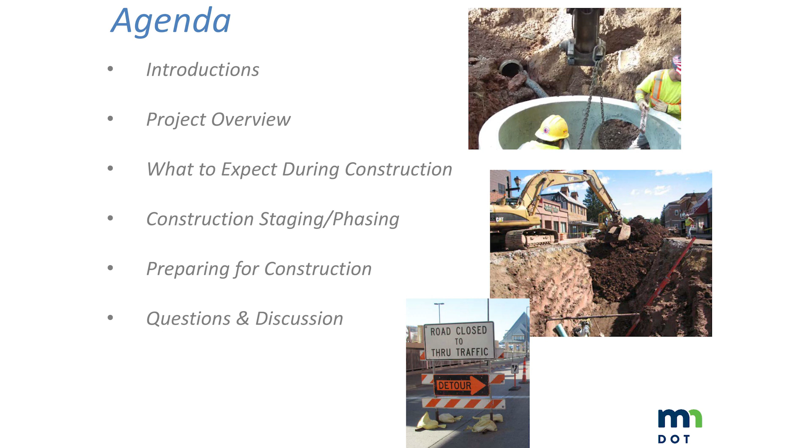So with that said, this snapshot literally comes from the title sheet that'll be on top of the plans. And the thing here tonight, I think we're going to really focus on the impacts in the downtown area. But the project does extend outside of the limits of Grand Marais.

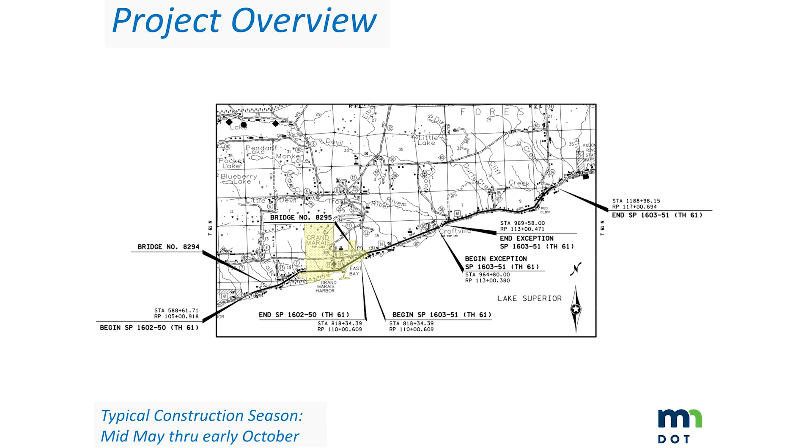So basically, when you look at this map, the yellow highlight is the corporate limits of Grand Marais. Down here near the south end of the project, about 3 miles south, the project begins near the Fall River, goes through Grand Marais, and goes for about 7 miles north of town and ends there.

So before we get into this, we want to try to give a quick overview of what the project entails and some of the terminology we're using. The project actually consists of different types of construction work, 4 different types of work, some within town, some outside of it.

Rural mill and overlay. When we talk about rural work on this project, we're going to be talking usually about the work that's outside of town. So that's basically what that's going to mean in the context of this discussion. It'll be the version of Highway 61 that you see when you come in and out of Grand Marais, a lane of traffic in each direction, 10 to 12 foot shoulders, and grades that go down to a ditch.

That work out of town from a roadway perspective is pretty much mill and overlay work with some details that we'll get into. That's where we mill the surface of the pavement a couple inches and put it back, and that's a rehabilitation to get some new life out of the pavement.

Urban, the next 3 bullet points - urban will generally refer to work that's in town. So urban has that meaning, which means we're in town. It also generally refers to a roadway that has curb and gutter. So that's the major use of that term. And then we've got 3 different types of work within town.

We've got a mill and inlay, which is basically the same type of work, a preservation scope - we'll show you some slides on that. Then we've got what we call full depth reconstruction, which is basically the idea that we're completely digging out and putting back the road, and we're also doing utility work below that road. So that's kind of the 'tearing down the house and rebuilding it' option.

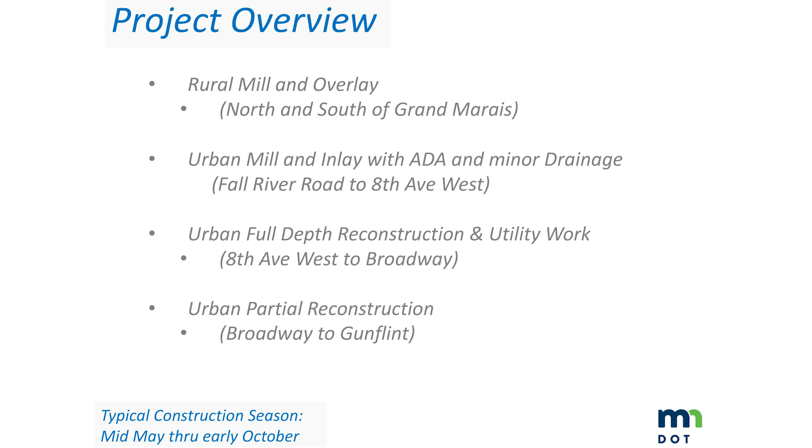And then we have kind of a hybrid of those two, which we're calling the partial reconstruct. And that goes from Broadway to the Gunflint, and we'll talk a little bit about what that means, but it involves both some of that preservation mill and overlay scope and some fuller depth digging.

So this slide shows you a comprehensive view of the project. So the light blue areas down here are that mill and overlay work, south and north of town. Again, we've got about 3 miles south of town that's mill and overlay.

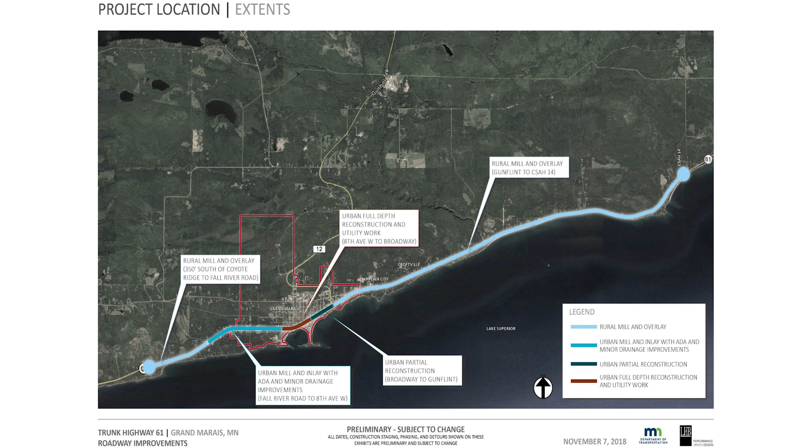That starts down by Coyote Ridge. And then north of town, just past the Gunflint, we get into mill and overlay work again. South of town, we are replacing the Fall River Bridge or box culvert, and that's going to require short-term closure of Highway 61. We'll talk about what that means in terms of traffic and potential needs to detour.

Here, this is that urban mill and inlay work. So we'll look at this, but basically from this point south or west, and I'll apologize in advance for this confusion. Statutorily, Highway 61 is considered north and south. That's how MnDOT refers to its highway. Very aware that within town, the highway generally runs west to east, and so I'll be balancing those terms as best I can.

Coming from the west or south, you've got 8th Avenue West. West of 8th Avenue West, we're not really changing the geometry of the street. It'll be the highway you're used to, but it will get pavement reconditioning, and there'll be a little work on the walks. The bigger impact begins at 8th Avenue West and goes to Broadway, and that's the full depth reconstruction where we're talking about digging the road out, digging utilities out. It'll be a big impact in the downtown core. From Broadway, from east of Broadway to the Gunflint, we've got that partial reconstruct section.

So again, all this adds up to about 11 miles of overall project: 3 miles of rural mill and overlay south of town, half mile of full depth reconstruct, half mile of partial reconstruct, and then 7 miles of mill and overlay in the rural section north of town.

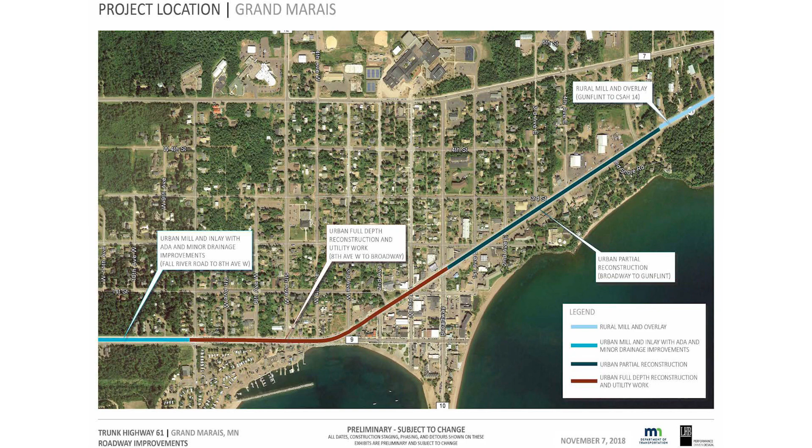So to give you a little bit more clarity on what this means, now we're going to narrow this down to what's happening in town for a lot of this discussion, but we'll come back to some of the bigger pieces out of town. So this is the urban preservation or the urban mill and inlay work.

This is what we call a typical section. So if you imagine the road as being a piece of cake and we took a slice and pulled that wedge out, this is the cross section of the road. The thing to take away here is you've got the in-place geometry that I'm sure you're all familiar with. We've got that 12-foot center left turn lane, a lane in each direction, and variable width shoulders that are either parking or turn lanes or versions in between.

The dash lines on either side depict that we're really not doing anything. That's an existing condition that's going to persist. And the dark line atop the pavement shows you that all we're really doing is that thin veneer of pavement within that road core. So again, the geometry of the road isn't changing. This is work that is generally done under traffic and is pretty straightforward.

The work happening in addition to this is what we call ADA work, Americans with Disabilities Act. That'll be selectively replacing some sidewalk panels for people that have disabilities or mobility issues, but relatively minor in the scope and scale of this project.

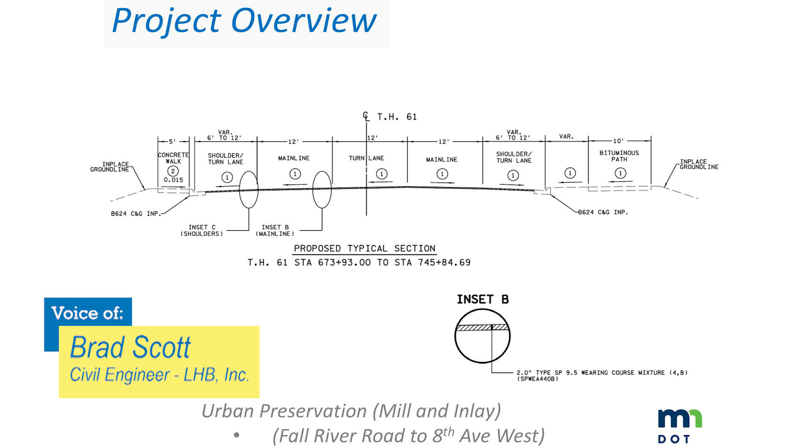And the layout process that the city went through with MnDOT came to a revised typical section, which is a road diet, as we call it, or basically a narrowing of the highway, so that the new pavement section really eliminates that center left turn lane. We've got a lane of traffic in each direction, 2 12-foot lanes and 10-foot shoulders. So you go from a road that was anywhere from 54 to 59 feet wide down to a road that's pretty much consistently 44 feet wide. So it's a narrower road.

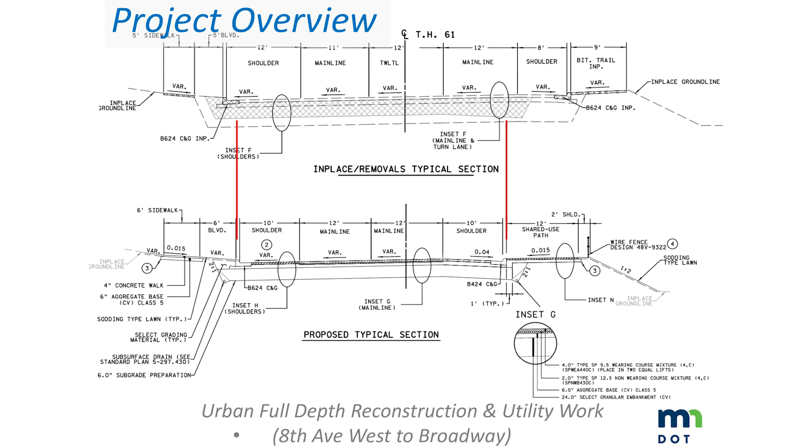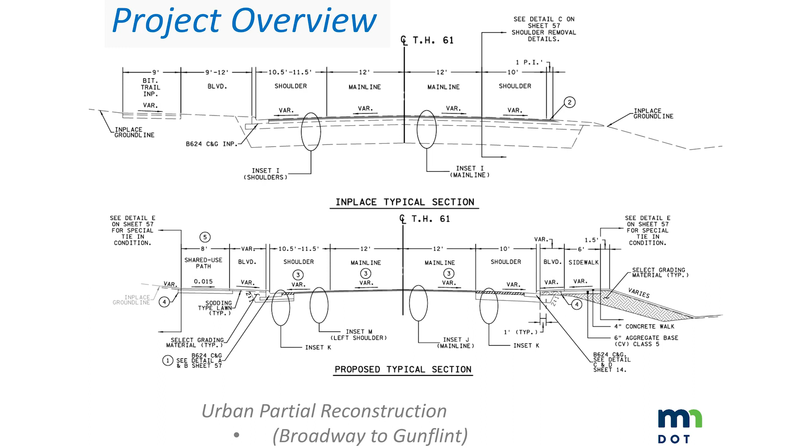So what we want to talk about with this next sequence of slides is, again, to give you an idea of what to expect. This is what the project's going to look like on your front doorstep.

The thing we can say about these slides is that this is very predictable. The projects of this type are not unique. There's definitely a flow and logic to how they get built. So as we go through this, it should give you a good sense of how the project's going to progress and what the major elements are and what impacts you can expect.

At the start of the project, the contractor shows up, and the first thing he has to do is separate his work area from the areas where traffic and people will be during construction. We call that the mobilization phase. The contractor installs these perimeter controls, including traffic control signage, and we'll show you what that'll look like and what the implications are. You'll have barriers adjacent to pedestrian walking zones where you have business access.

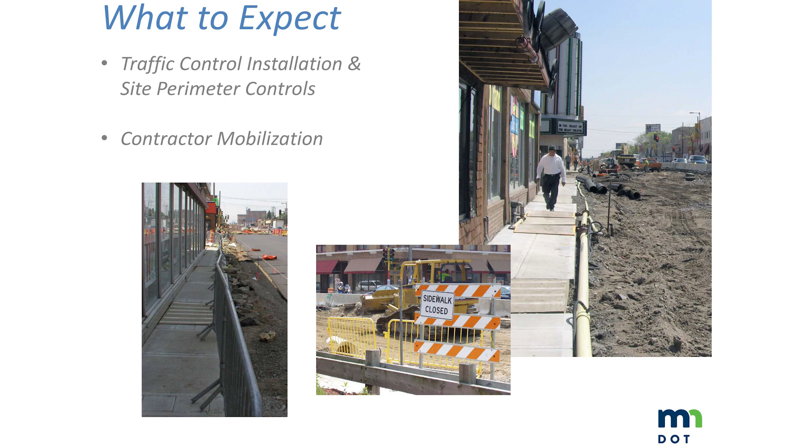This slide on the right really gives you a sense of what that'll look like, especially in the downtown core between 3rd and Broadway. The work zone will be immediately adjacent to a lot of building storefronts. There'll be an active work zone right in the heart of downtown, and it'll be there for that entire construction season.

But we'll talk about that, there's some nuance there. So after mobilization, what happens? Well, the first thing is they're going to rip off the surface pavement, and pretty much everything within the MnDOT right-of-way is going to get pulled out. The excavator comes in, rips the pavement, rips the curb out, loads it into the trucks, and we get rid of everything, basically exposing that base material beneath the highway.

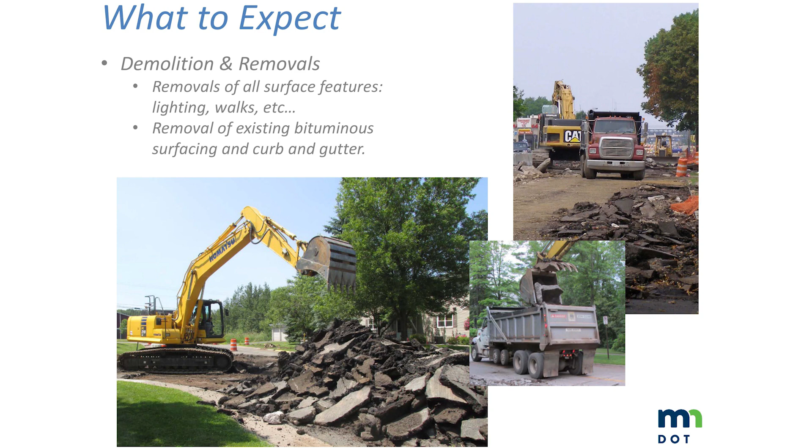Then the next phase for the contractor is to start the utility work. As I mentioned, when MnDOT came to the city and said we've got this project, the city responded that they want to be involved and have existing infrastructure that needs to get replaced. One of those pieces is city water main. There is water main that will get removed and replaced with this project from 8th Avenue West to 5th Avenue West, and there are also crossings at the avenues listed there.

The main thing here is that the contractor generally builds the project from the deepest utility up, and water is usually one of the deepest utilities next to the sanitary sewer, typically at a depth of 7 to 10 feet to be below the frost depth. The big thing I'd draw your attention to is that when you go down to 7 to 10 feet, in order to build an OSHA-safe trench and meet all the requirements contractors have to, they have to lay that trench back.

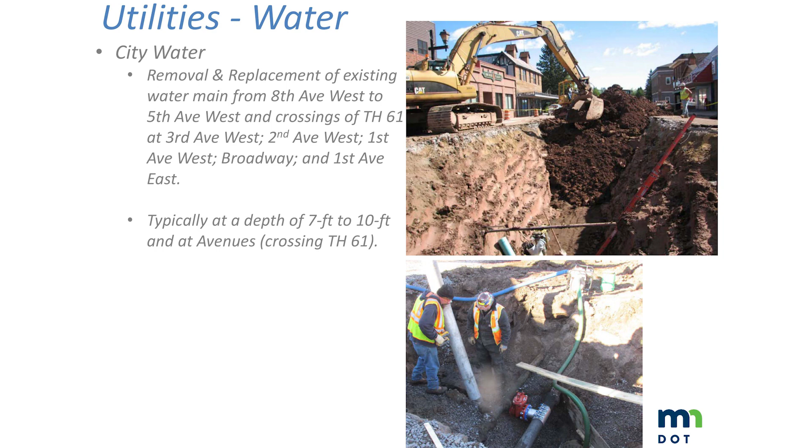So when you go down 10 feet, you're laying a slope back that creates a swath of excavation that's anywhere from 20 to 30 feet wide as you go down where that water main is. That's a representative section of what that's going to look like, and this water main runs parallel with the road. We'll show you some slides.

One thing that gets into construction staging and sequencing is that when you build a new water main, people are relying on that water main, so you can't simply dig it up and tell people we'll come back in 3 months when the water's ready. A key initial phase is to build a temporary water main at the surface, smaller diameter, which gets built and disinfected. There'll be a connection to that temporary main for each service on the current main, with a short interruption of service, usually 4 to 6 hours, coordinated in advance as much as possible.

The contractor should know where he's at and will tell people, we're going to do your water service today, you'll be out of water for a few hours. Once everyone is connected to the temporary water main, the new water main gets installed. At the end of that, there'll be a similar interruption where people are taken off the temporary main and put back on the permanent main.

This is an interesting aspect of this project - we're doing 2 types of water main replacement. One is the classic method where we dig it up and build it back. The other is called pipe bursting, where we use the in-place water main as a conduit to pull the new main through using a pipe cutter. Same process, same impact to the public really for either method.

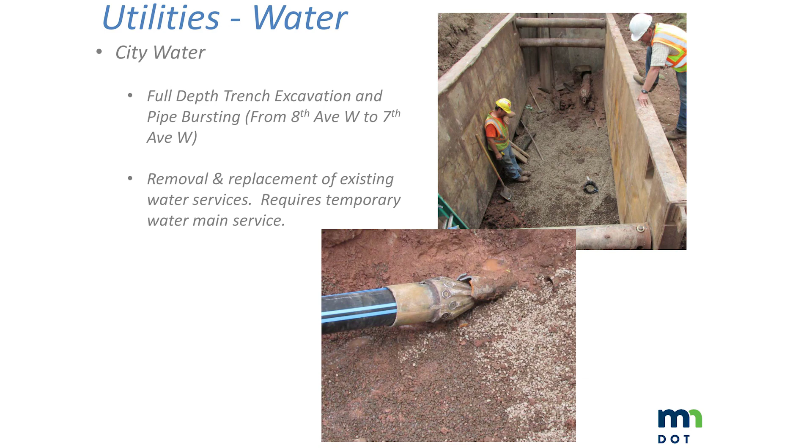After we get done with the water main, the city has old sanitary sewer that also needs to get replaced in this part of the project. The old sanitary is very similar to what's shown here - old vitrified clay pipe, very brittle. In the case of the existing sanitary main and for the city, it's in very poor condition, so it wasn't an option to line it or rehab it in place. It's really got to come out.

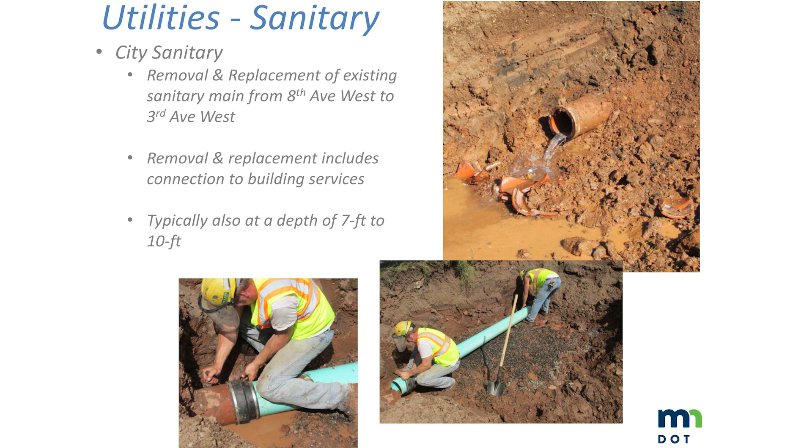This utility is also 7 to 10 feet deep, and it'll get replaced with new PVC pipe. The picture here shows the connection between the old and the new. This is similar, but a little less impactful or disruptive to anybody with a service connection. They'll bypass flows to get around the work area, and the contractor will ask people to limit their water usage during that connection period, but it should be less consequential than the water main connection.

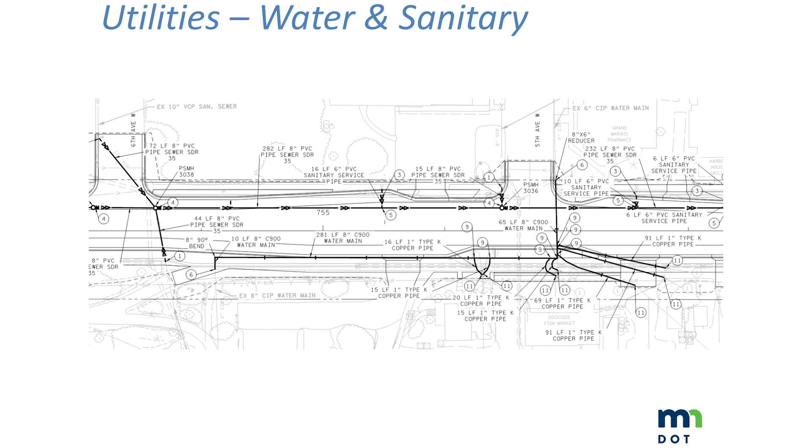This is a snapshot from our current plan showing a segment from 6th Avenue West to 5th Avenue West. The sanitary main is depicted by the long line with the 2 arrow dashes - that's the sanitary main. There's manholes, and there's also service connections coming off that have to get connected. The water main, on the other side of the highway, runs laterally with the highway, and you can see all the branching service connections coming off of it. It's a big impact within the core of the highway, but that's actually not unusual - that's typically where water and sewer utilities are.

The next utility is storm sewer, because it's usually the next deepest pipe. Storm sewer is the system that collects rain and storm water from the highway, going into catch basins and down into pipes. This tends to be shallower, so that big trench gets a little smaller. There's a trade-off though - catch basins tend to be more clustered at intersections, so you'll see more impact at these locations, with leads coming from various catch basins into the trunk main. So you limit the depth and width, but it's more impactful at intersections. These are the catch basin or manhole structures, and that's the pipe, usually reinforced concrete.

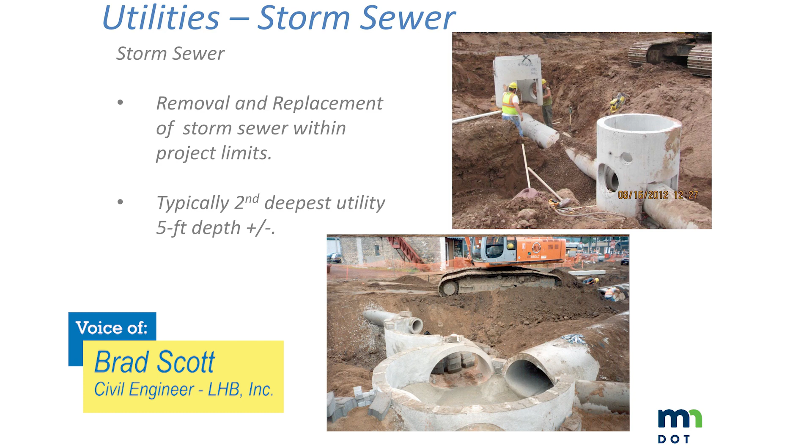This is another snapshot from the plan for the storm sewer at 7th Avenue West. Here you can see the catch basins spaced along the highway, collecting drainage from the highway. Any water coming down the avenues is also intercepted - that's where all these nodes collect to go into these manholes and then down the hill and into the lake eventually.

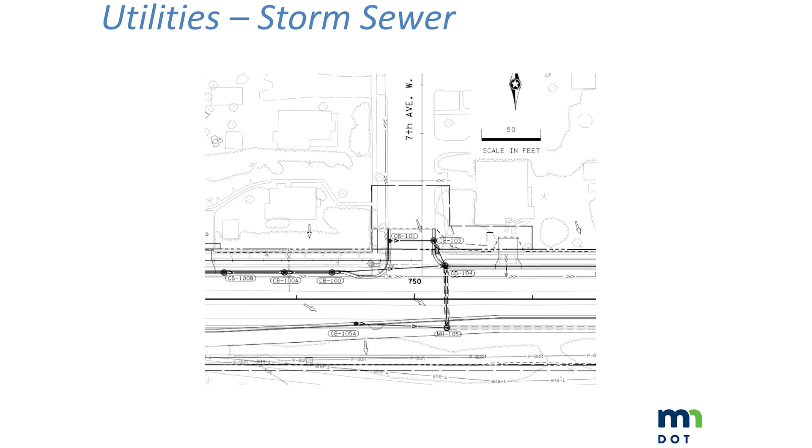Another overlay for the project that's unique in this urban corridor is box culvert work at 4th Avenue East. The box culvert here is a 10-foot wide by 4-foot high box culvert, which statutorily, technically makes it a bridge.

We also have a box culvert that's even bigger at Fall River, south of town. Box culvert construction uses a bigger pipe, precast segmental construction, typically lowered in place by a crane, locked together through jointing and tie rods, and then these apron structures get involved.

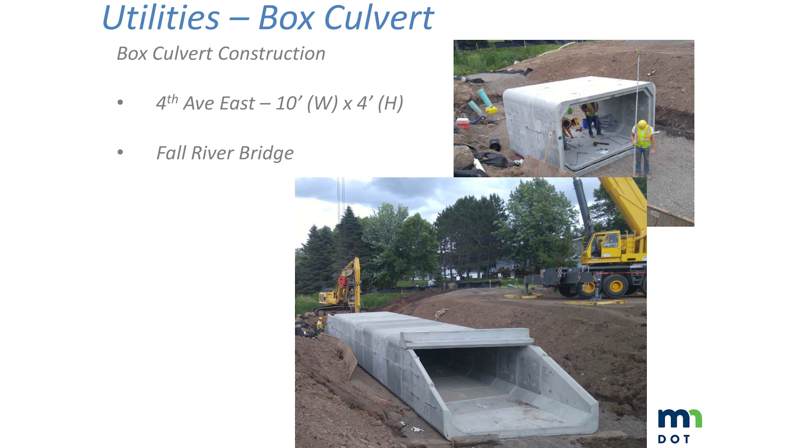Right now, that work is at 4th Avenue East, and there'll be some staging and sequencing needed to basically try to build that culvert half at a time as we go through it. So kick traffic one way, build half the box, kick the traffic the other way, build the other side of the box. But it is a bigger excavation that's going to happen in the downtown core.

This is a snapshot of that box. It's highlighted in yellow, spans the full width of the highway. There's some retaining walls that need to be built at the inlet to protect the slopes against erosion and scour. The storm sewer connects to it, and then there's actually some sanitary sewer that gets rerouted. So it's a significant piece of work in your downtown.

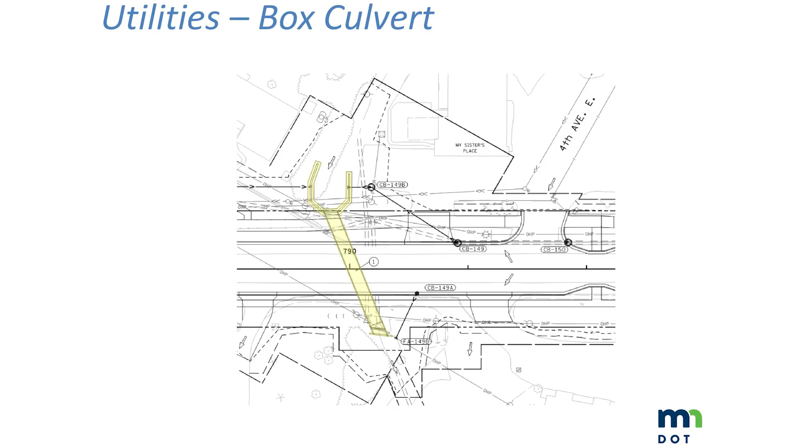And then we have an even more unique part of the construction. This is what we call the MPCA dig. The area highlighted in yellow between 3rd Avenue West and 2nd Avenue West is an area where there are petroleum contaminated soils. This jagged line you see is the somewhat irregular right-of-way that extends down the corridor here.

And the takeaway here, as you can see, is that this work extends into these parking lots on the north and south sides of the highway in this area.

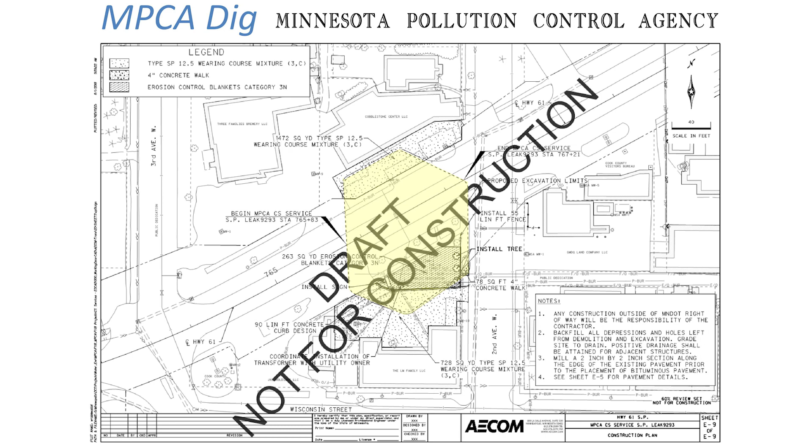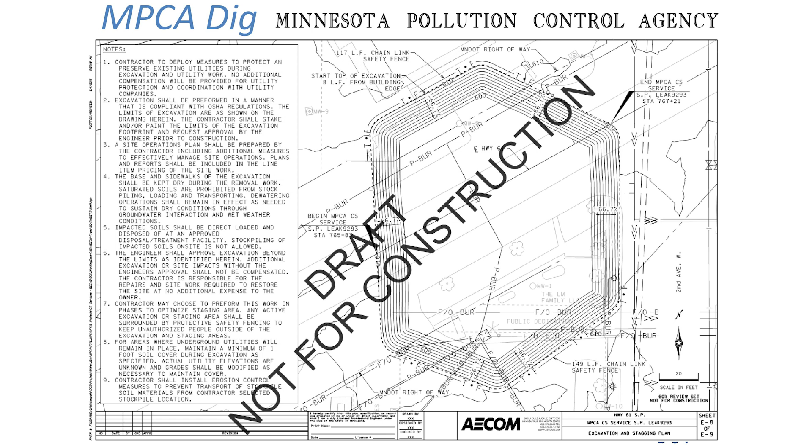This gives you another view of this. This is a contour map of that excavation, and this dig will go 10 feet down to grab these contaminated soils and get rid of them. This spans roughly 100 feet by 100 feet in each direction. So it's a big hole and is a big part of some of the staging considerations we had to look at in looking at the project.

Another piece of this that trails and flows from everything else is what we typically call third-party utility adjustments. These typically are power, communications, fiber, telecom, and lighting. In this case, the city's got ownership or interest in lighting and power. But typically these utilities move at the behest of MnDOT and the city to make room for their utilities.

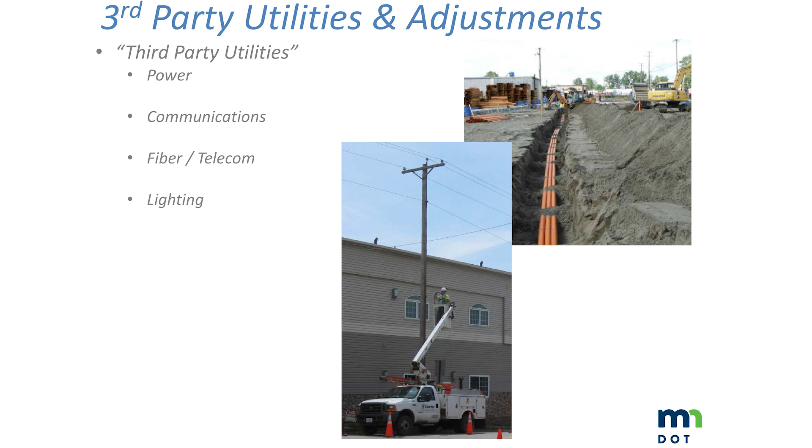So in this case, power poles may need to get relocated or held during construction. This orange interduct is typical of a 2 to 3 inch fiber line that might need to get adjusted to make room, for instance, for that big box that we're putting in. So that's another component of this work that has to get done and coordinated by MnDOT's contractor as part of the work. So once we get the utility work, we can then pivot to the roadway work.

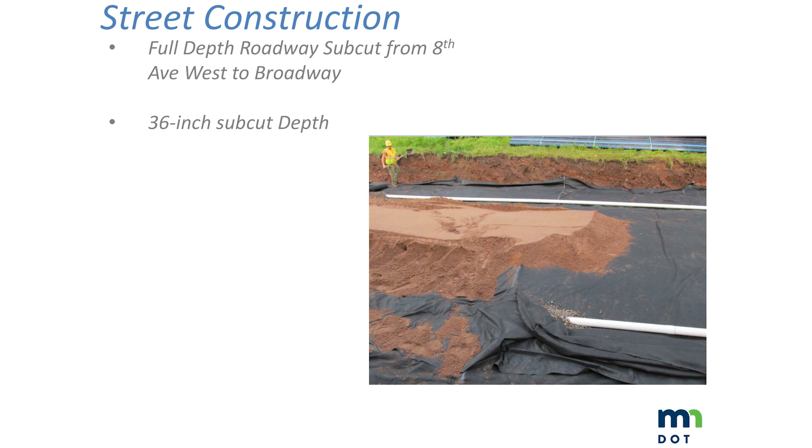After that subcut and that first sand layer gets placed, this is the typical operation. You get a dump truck that comes in, drops the sand in, the bulldozer comes behind, pushes it out in 6 to 8 inch lifts, and then a compactor has to come in and sequentially build those layers so we get the good compaction that'll make the roadway last in that section.

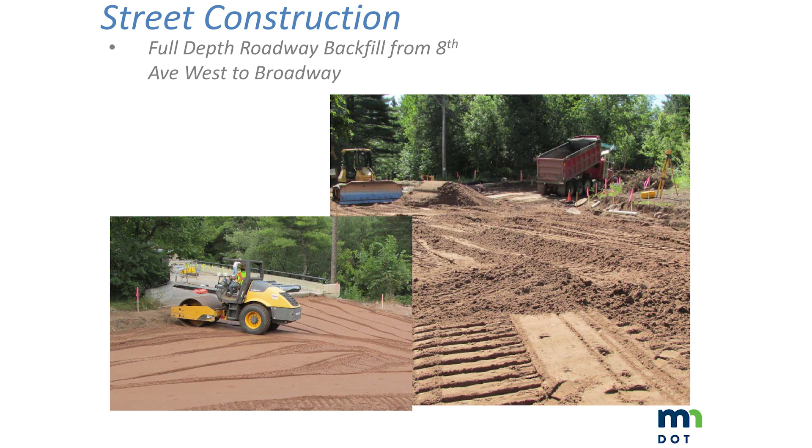After we build that sand layer, we can start looking at the operations to get to the paving. We put in an aggregate base layer that's typically 6 to 8 inches thick. This is a paving platform, so it's a denser material, it's more impermeable. It gets placed in the same way, but instead of a compactor just rough grading it, the motor grader will come in.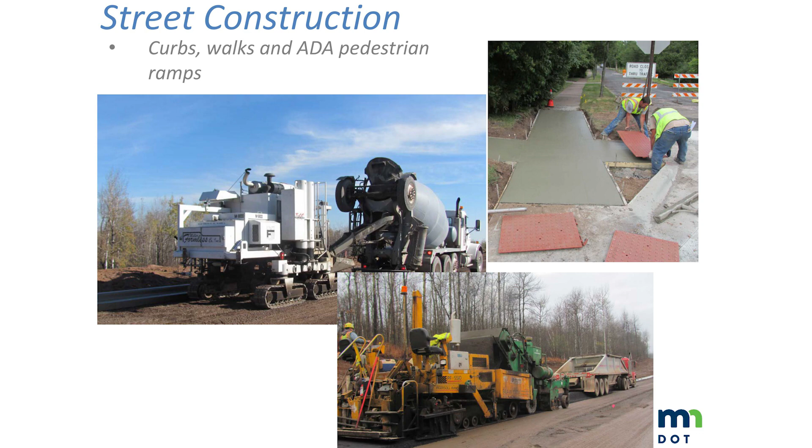Just to talk about paving, there are two types really that we're talking about. Within those areas that we've talked about, mill and overlay and mill and inlay, it starts with this operation where they come in and mill the pavement off. That's literally a milling machine that comes in, the teeth grind the pavement up and eject it into the truck and get rid of it. Then in either case, once the pavement's milled or once that base is ready, this paver comes behind.

I'm sure everybody drove through Two Harbors, so at some point I'm sure you guys got to see this more close and personal than you may have ever wanted to.

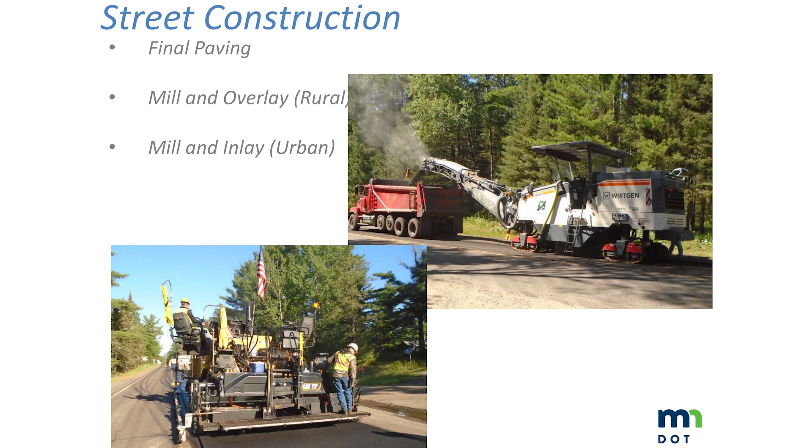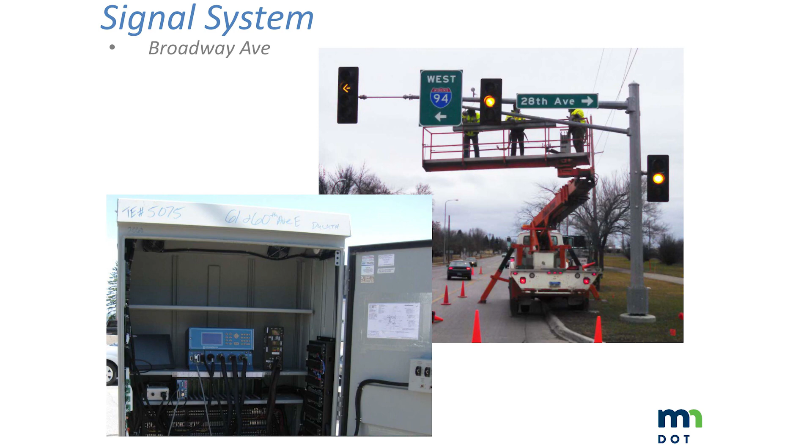Once all of that's done, we still have work to do. We've got the surface features that we've got to get in. There's a new signal system that'll be put in at Broadway. That's the only signal system being built with the project. That's a signal mast arm. There's usually a signal cabinet that has the controls that'll dictate the sequence and timing of the signal.

Last but not least, we've got the street furnishings and amenities. There's work going on there. As Michael mentioned, the city got grant funds that it can leverage to use for a number of these amenities, but this is everything from benches, trees, anything that really kind of beautifies the streetscape from a pedestrian point of view. This work, including lighting and ornamental lighting, is all on the table and still being worked through as the final design progresses.

This will all try to get in. Obviously, it's usually the last thing that gets done. The thing to mention here is that we typically do see that trees and plantings might have to extend even into the next season, because you run out of time for the ideal growing season to get those plantings established.

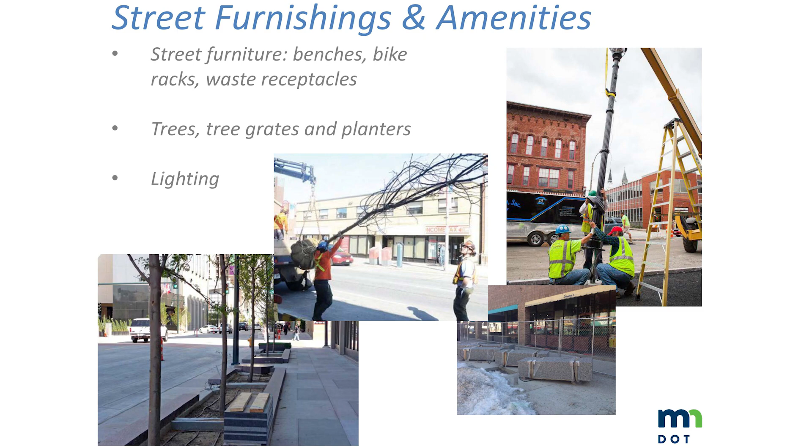So that's the project from beginning to end. It's a big project, obviously very impactful. What we want to talk about next is the construction phasing and staging. As Michael mentioned, the key thing that we're looking for here is how do we build the project efficiently, but how do we balance that need for efficiency with the obvious need that this is a highway that goes through your downtown.

It's vital to the downtown, so we're trying also to minimize disruption, provide as much access as we can to residences and local businesses. So we've looked at a number of different options and want to talk with you a little bit about some of the background and engagement we've had with the city up to this point that have got us to the point where we think we can say this is how we think the project will be staged and phased.

As Michael mentioned, we go through this series of questions that we have to ask ourselves. How can we maintain traffic? Because that's a big piece of the puzzle, especially as all this traffic leads into the downtown. So the first thing we ask ourselves is, when everybody looks out there, it's a relatively large tarmac of pavement. Is it possible to build this project in a way that we could maintain a lane of traffic in each direction? What this section shows is a plausible version of that we looked at, and the things I'd point out to you are we have sort of prescribed minimums for what we can get away with here with this section, even under construction.

We can compromise a little bit on width during construction to be practical, but really, when you look at an in-place curb line, we need to maintain 2 feet from that curb for curb reaction, away from the edge of the driving lane. We can have narrower 11-foot lanes, but don't want to get much narrower than that, especially with the level of traffic and truck traffic you see through town.

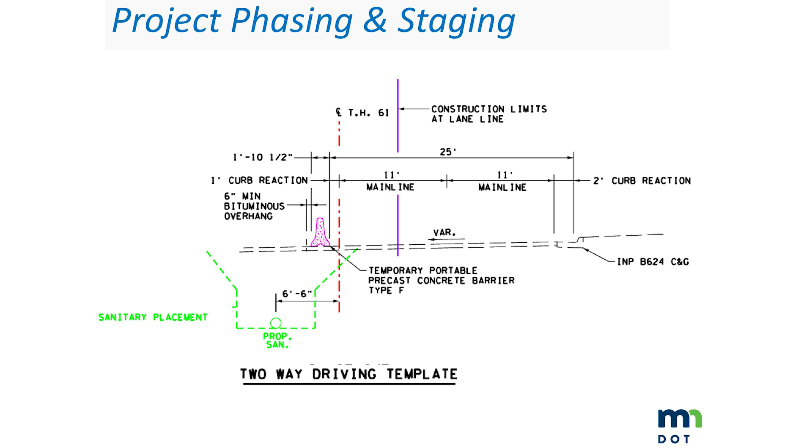And what we found out, if you think back to that picture we showed you of the water and sewer, with the way the road is narrowing and the proximity of these utilities to the highway work, it doesn't work out. But that's the simplest thing I can put to you: we cannot maintain a lane of traffic in each direction and get this project built, A, because the highway is getting narrower, and B, because of the utility work.

So the next option we looked at is, if we can't maintain a lane of traffic in each direction, what level of traffic can we maintain? This option shows what we're calling the one-way driving template. This driving template is basically half of what you saw before, with basically the same dimensional characteristics. It adds up to about an 18-foot platform that we would maintain for traffic, and it works. So we can maintain a lane of traffic adjacent to the work zone to get the water, sewer, the deep excavation for the roadway subcut, and the narrowing of the road. That's an option that we carried forward.

And as Michael mentioned, this is looking like a 2-year project. I just want to talk quickly about schedule. Michael mentioned we're about 70% done. We're wrapping up design going into the early part of next year. This project is going to let in May, and the way the contracting and material procurement process works, that means the most likely construction start date is sometime in July, probably shortly after the 4th of July holiday.

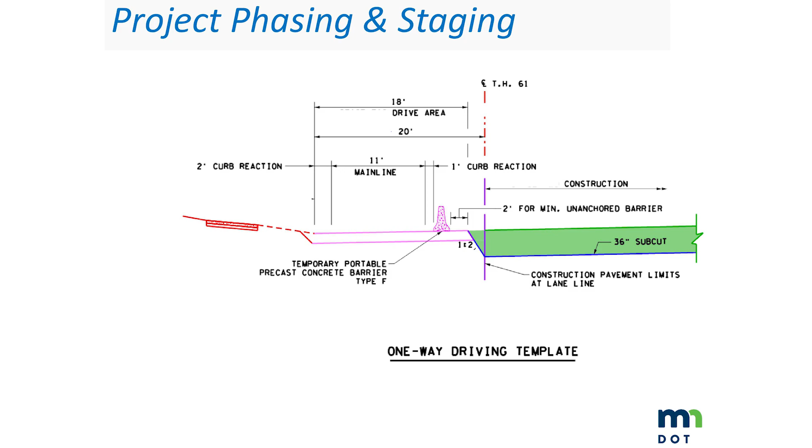So phase 1 takes us into 2019. This is basically what we're calling the 2019 construction season, extending from a July date to be determined until the end of that season, which is usually weather dependent, but typically not too much later than October, mid-October to November if we get lucky with warm weather. Again, up top, you can see this inset shows the project, the same one we looked at before. The intent in 2019 is to do a lot of the pavement work outside of town, including the Fall River bridge work.

When you come into town, the current thinking is we'll build the mill and inlay urban preservation work from south of town near Fall River Road to 8th Avenue West, and we'll also get into 8th Avenue West and try to reconstruct that to its final condition as part of year 1 work. From Broadway to the east, we'll do the work that goes east to Gunflint, and we're looking at doing that box culvert. This section and portions of this work, though, will likely trail into the next construction season.

The big takeaway I'd give you here is, with the exception of the work at Fall River Bridge, generally this work will be done under traffic with lane shifts and flagging. So under 2019, for the most part, the highway should be able to carry a lane of traffic in each direction, subject to the interruptions and constrictions of that work.

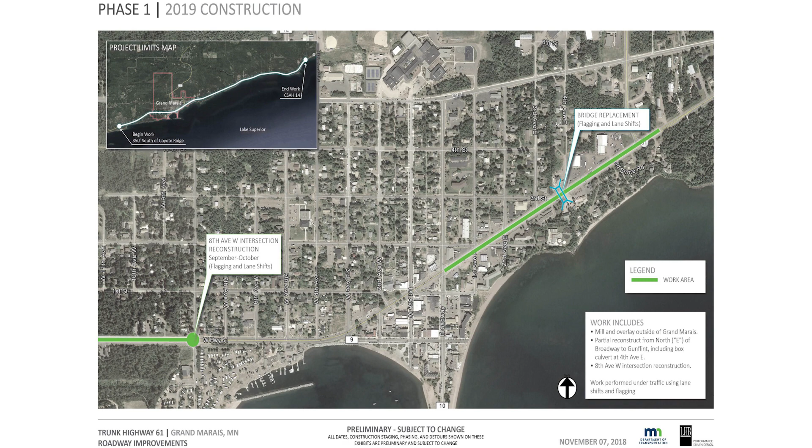In order to get this work done and maintain traffic, we're looking at a signed detour for traffic coming into town. The basic idea is there'll be a signed detour that directs traffic up 8th Avenue West, over to 5th Avenue West, up to the Gunflint, around and back down. There'll also be signage saying if you're intending to go downtown or access local businesses, you can stay straight and get into the downtown core.

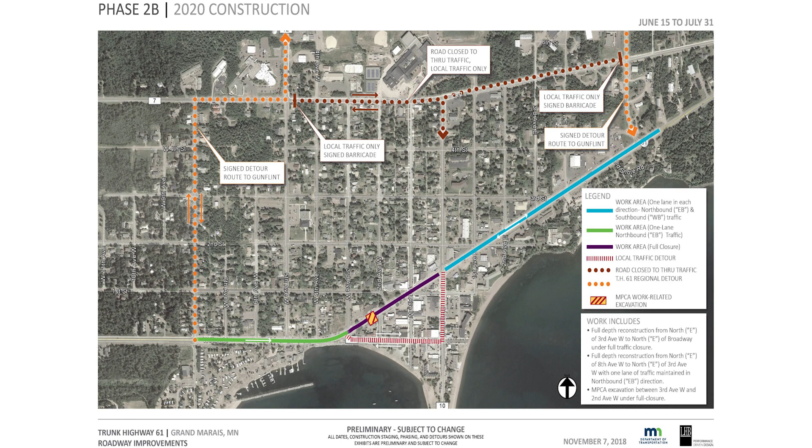This segment of the project is substantially similar, going from June 15th to July 31st, in that one lane of traffic persists down to 3rd Avenue West. That local through route goes down Wisconsin, comes up to Broadway. The area from 3rd Avenue West to just west of Broadway is fully closed to traffic, and the detours and restrictions in this area are the same as we discussed previously. So that's phase 2B, June 15th to July 31st.

Then phase 2C, the latter part of the construction season, the major change is that we're requiring the contractor to have that downtown core complete and reopen to traffic as of July 31st. So that's the area from 3rd Avenue West to Broadway. This area will remain one lane of traffic in the eastbound/northbound direction, and that work will have to persist again.

I think Michael mentioned it - if you were looking at it from a contractor's pure convenience, you'd say close everything and you'd get the maximum benefit in terms of the shortest duration of the project, but you'd also get the maximum disruption and inconvenience for everybody in town. The trade-off you have anytime you maintain traffic is that you lose efficiency.

So this work, we gain efficiency by closing this, and we're able to get this downtown core back to some semblance of normality after the first part of that construction season. But the utility work that's needed here, the requirement to maintain traffic will mean that this work will continue through the second part of the 2020 construction season.

One thing I wanted to mention, true of all phases, is that right now there would be a temporary signal, it's thought, at 5th Avenue West to help manage the traffic at that intersection, which was seen as being one of the more critical intersections that would need that control.

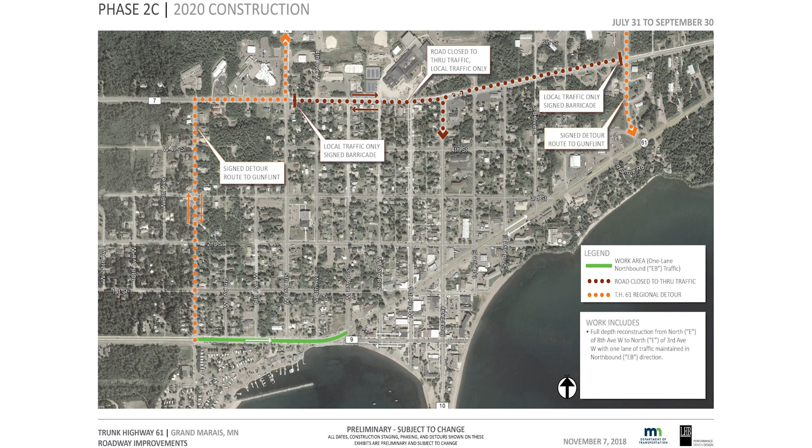So to take a step back and talk about the rural plus the urban component to this, in 2019 we talked about it's thought that we'll go after that Fall River Bridge in that 2019 construction season. In order to do that and get that bridge out of the way, the work involves not only realigning the box, but will involve rock blasting to get that new box in there. I'm sure anybody that drives by Fall River can see the exposed ledge rock that's there.

There'll be rock blasting to get that work done, which will take about 3 weeks. Highway 61 would be closed there, and MnDOT would work on a detour using County Road 7 as the bypass route to get traffic around that work zone for the interruption. That's what would happen in 2019, in effect for that period to get the box culvert in at Fall River.

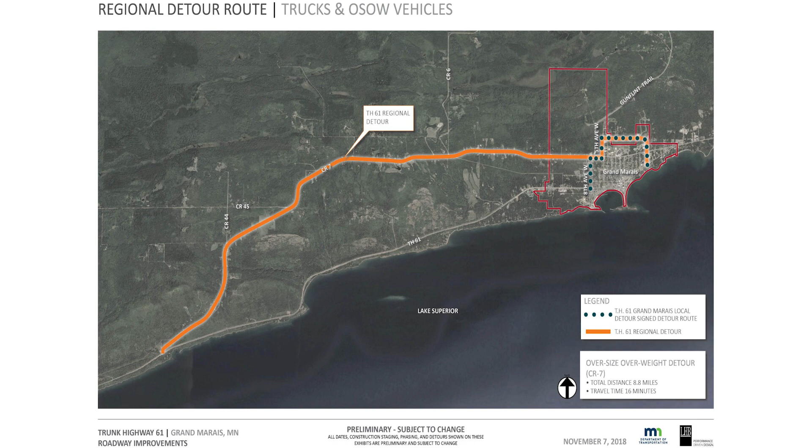In 2020, this route would persist as a route for oversized, overweight, and truck traffic to get people on County Road 7. The red here is the town.

To zoom in and give everybody a sense of scale and proportion, the County Road 7 detour comes from the south or west side of town. Here's the local detour we talked about, going up the Gunflint and coming back down.

So that's the 2-year construction phase. The work can get done in 2 years, maybe with some final cleanup and final paving depending on how everything wraps up in the downtown core, but generally it should be done in a 2-year time frame.

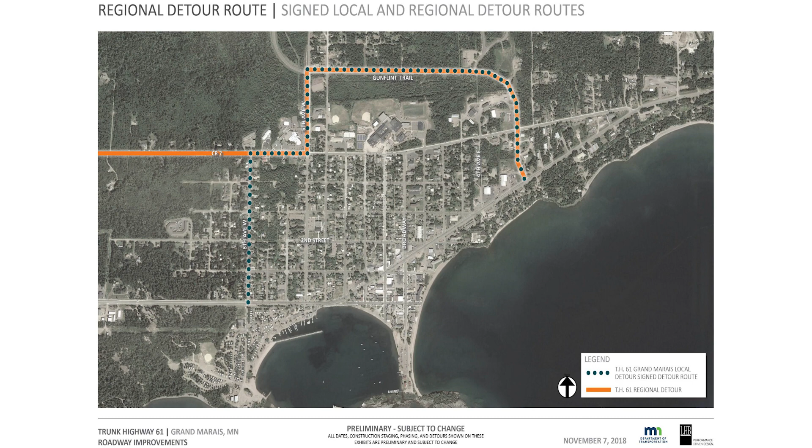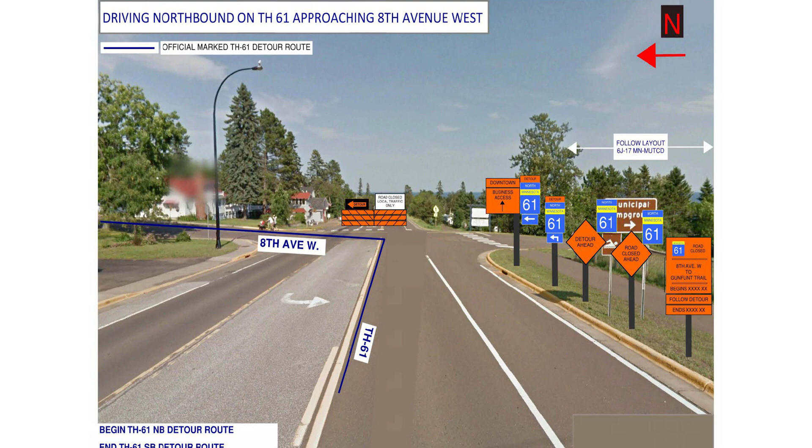Similar arrangement of signs on the other approach, really identical in all respects. We're telling people that if they're going to stay on 61, there's a route for that. If they want to get into downtown, they can use the business access and circulate through downtown, either coming back to 61 or going up Broadway. There'll be options for that.

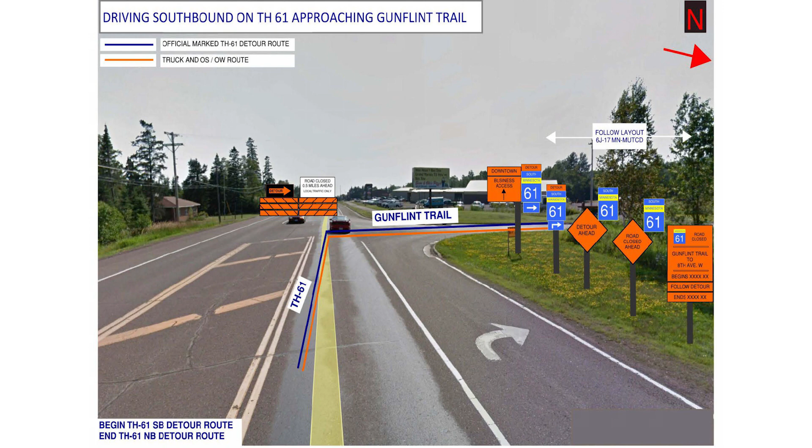So that's construction, staging, and phasing for the project. The next part we want to talk about are the steps that can be taken, and we're inviting people to take, to get ready for construction.

The background here is there are really 4 parties part of this process: MnDOT, the city, the contractor, and the community made up of businesses, citizens, and residents. There are different levels of control and influence everybody can have to make the project a success.

Construction traffic, dust, and noise are sort of the unavoidable nuisances of construction. They can be mitigated by the contractor, for example by controlling dust through watering.

There's a likelihood we'll have weekend and night work. We're trying to balance the issue that some service interruptions and work that might have to happen at the front of a doorstep probably shouldn't happen during core business hours or key periods of time. To be true to that goal, we've got to give the contractor flexibility to do work during off-peak times, so there'll be some give and take that has to be considered and built into the project.